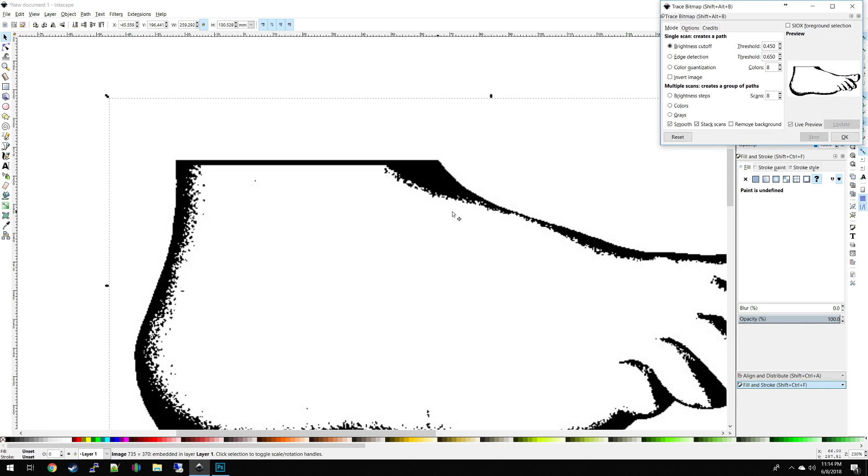Let's take the foot. Let's kill it. Bring in smaller foot. Then, gonna make a vector out of it. Trace bitmap. Close. Kill the original image because we don't need it. And now we got a foot. And back to where we were before, but I'm gonna make this 80 wide.

So a shitty add-on connector will fit in a 5mm by 5mm space. So when I do this, I always actually create a little port that's about that size so that I can figure out while I'm in here where I'm not going to put it, because you want to make sure the copper layer doesn't mess with that. So it's good to think ahead, especially when you're just doing the art part.

That way, if you're going to have an important detail, you're not having it somewhere it's going to automatically get removed. So I'd like to put this on the big toe. So big toe. All right, nasty big toe. Looks like it's shitty add-on friendly. Let's see.

Whoop. Hold on a second. It's the first time I've ever attempted to stream, so I'm trying to make sure everything's actually working. Alright. So cool. Bigfoot, little add-on, big dreams. Alright, let's go.

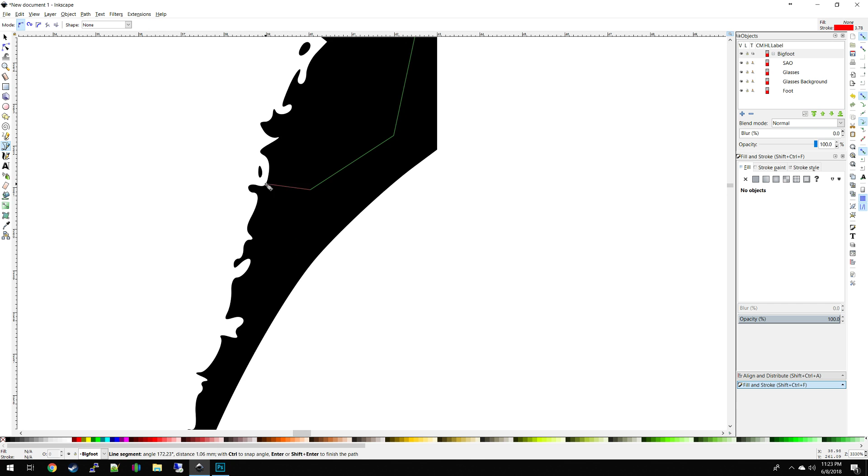I arguably spend more time in Inkscape than I actually do in KiCad at this point, because by the time I come into Inkscape, I have a really good idea of what I do in KiCad. So I spend most of my time doing tweaks and things like that in Inkscape, because I'm anal retentive about particular details.

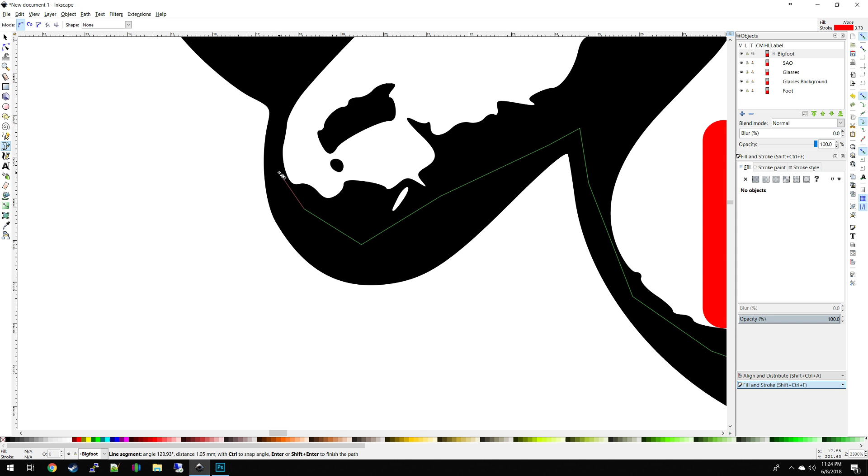Like, it's not a big deal on this because I'm just throwing it together, but when I work on actual projects, I don't like sharp corners on graphics because it's a sign of basically laziness, unless it's supposed to be a sharp corner. If it's a board itself, I really don't like boards that have sharp edges on them. They kind of don't feel so good when they stab you in the side when they're swinging from your neck at a conference. And it's also not that big of a deal to undo it, so there's no real excuse.

I didn't really need to include the glasses in that, but I'm going to anyway. I'm gonna kill the stroke on this. And I'm gonna do the fill. Actually, it's black, so... And I'll drop that to the back. And so you see, it filled it in. So what I really want is to get my board shape out of this, ultimately. So I'm just gonna call this foot fill because that's a weird name.

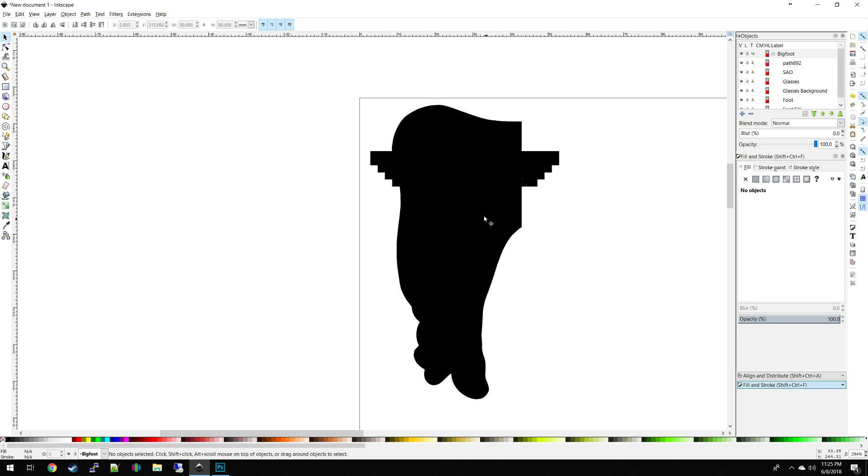And I'm gonna duplicate these, and with them all still selected, I'm gonna go ahead and come in here and do a combine. And that is basically what I'm looking for. Now the final moment of truth. Actually, I might have messed up in one area. We'll find out in a second. I want to click on that. Yeah, see, that's not good. So this is just a bunch of extra nodes, and it'll really screw up what you're going for. So I'm actually going to kill that.

I'm going to expand this out a little further for now. Oh, nice graphical glitch. And I'm going to do this again. Let's see. I also might have chosen the wrong thing now that I think about it. So foot, fill, glass, background, duplicate that, and path. Let's do a union. Yep, union was the right one. I just picked the wrong thing.

Okay, so this is ultimately going to be our board outline, and I'll show more about that when we get to that point. But it's good that you get this put together now at the early stages versus later, because if it ends up being a really complicated shape that you can't quite get your board outline, it's going to kind of fuck your day up, and you're going to spend a lot of time on it. And that super sucks.

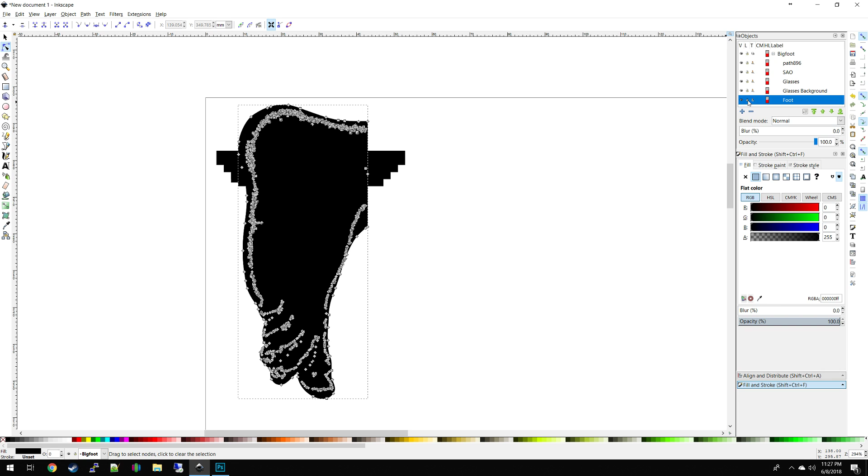So, alright. Now that I got this out of the way, I'm going to undo the move for it. I'm going to kill the foot fill because I don't need it. I'm going to keep the foot. I'm going to call this outline. And I'm pretty happy with the overall shape. So I'm going to go ahead and do something.

I actually learned this technique from the AND!XOR guys. Specifically Zap, he did a stream, and he showed a pretty interesting way on how to align your graphics in KiCad by using coordinates. If you import all your graphics at the same size, you can just use the base coordinate to align everything. I'm ashamed to say that I did it the super hard way manually until I saw him do that.

So keeping that in mind, when you make molds in real life, if you've ever seen how they do molds, they do something called registration, which is where you create marks that act as points so that the mold will come together smoothly, and it can only fit together one way. But in reference to KiCad, what I do is I'm going to make a shape. Actually, I'm going to make a new layer quick. I'm just going to call it registration because I'm only going to use it temporarily.

And let's see, how big is this combined shape? It's 50 by 80. So I'm going to make this registration, we'll say 60 by 90. And it's not going to matter, and you'll see why later. So I'm just going to make this 60 by 90, and then I'm going to put a stroke on it for 1 millimeter. I'm gonna make this stroke black, and I'm gonna kill the fill. And I put in the wrong code for that.

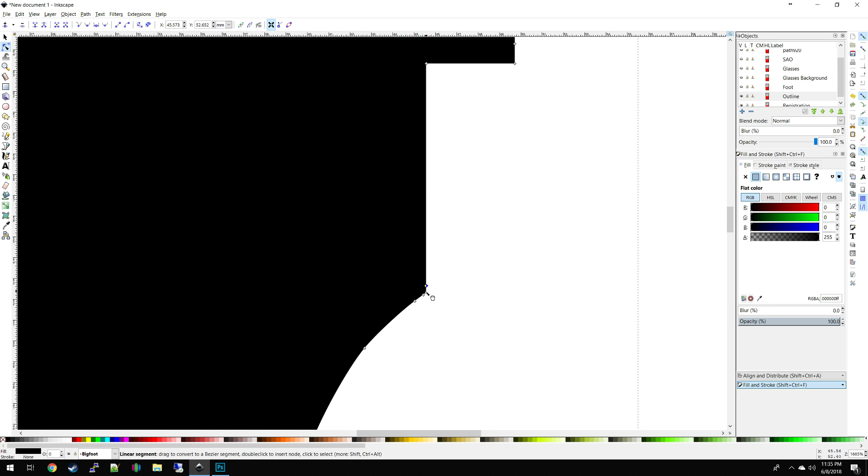And I'm gonna leave the sunglasses like that because that's kind of the whole point of them being like that. So we'll do it to this one. There we go. Now those are a little rounded off. That again makes me happy. And I did that to the outline. I'm not going to bother doing it to the actual foot because the outline's going to end up cutting it off anyway.

And normally what I would do if I wasn't throwing this together is I would fix it on the original graphic. So I'd do it on the foot and then I'd redo the outline. In this case, since I deleted the thing I used to create the outline, it'd take me a little longer, so I'm not going to bother with that this time around. So either way, we got a finished graphic. This is what we're going to turn into our board.

So how do we do that? So if you do everything in Inkscape, which if you're doing this like I do, you should. Bigfoot. And really, this is just great for putting together your board graphics. So, all right. So there's this extension. It's called SVG to Shenzhen. It's actually a very good extension.

I actually helped the person who threw it together. I was one of the first people to start using it. So thankfully, they've been really responsive to feedback, and they've gotten most of the kinks out of it. So it works pretty great. And to use it, once you do your graphic, you need to know how large your graphic is, and you need to pick your biggest number. So since I'm using the registration, I already know how big this is.

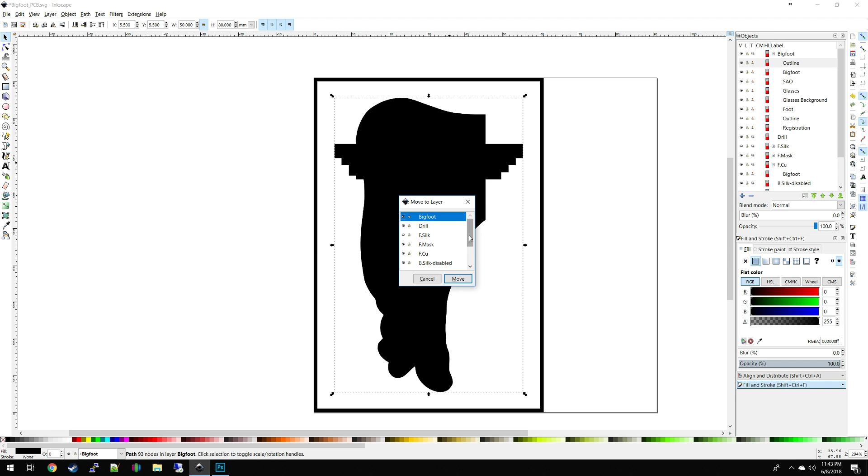And now the last thing, once you've got your silkscreen, mask, assuming you're doing anything with the mask, and your copper, is you're gonna need to deal with your edge cut, which is your outline. So I'm gonna copy the outline, show it. I'm gonna move it to layer, and I'm gonna show you the most important part now, edge cuts.

Oh, hello, Chewbacca.

Actually, I don't think I finished. Let's hide the mask. Yeah, I didn't finish this. Let me change this to black real quick. Alright, there we go.

Alright, now edge cut. So, when you click on the nodes, you see there's not really that many. That's actually not good, because it's going to use curves, and you can't convert curves to polygons for some reason in KiCad. They need to be flattened. So the way you get around that is you just add more nodes.

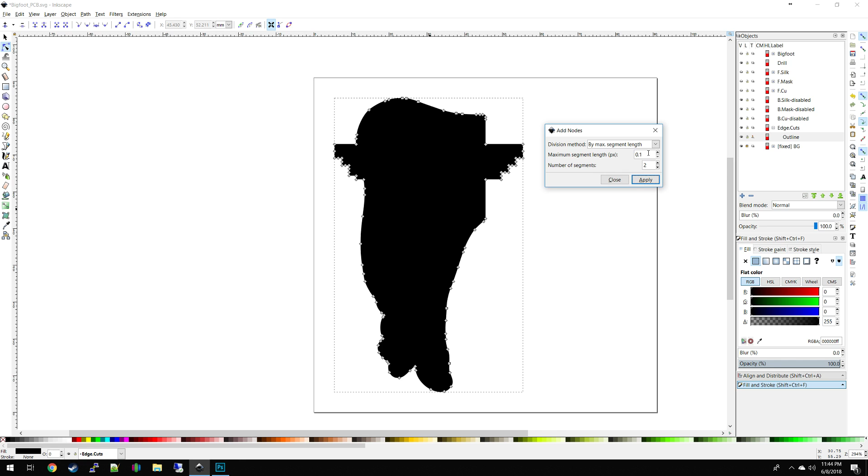So in Inkscape, you go to Extensions, Modify Path, Add Nodes. The first one you leave by default. The second one you change to 0.1, segments 2. You click apply. It takes a second; the more complicated your graphic is, the longer it takes.

The most important part, though, is that when you come back and you look at these nodes, they need to be on the outside. If they're not on the outside, you're gonna have a bad time later because your outline is not going to be correct. So, first, I just realized earlier I did not do the registration on the front mask or silk, so I'm gonna do that real quick.

Just gonna move to mask and duplicate again and move to copper, and that's gonna become more obvious once we're working in KiCad why that's important.

Okay, and now we're done. Now for this next step, you don't have to have your layers visible. If they exist, it's going to be included in the output, so you don't have to really worry about that.

I'm gonna get a directory here real quick just to make this next step a little quicker. KiCad.

Alright, so now when you have more or less your board done and your graphics done, I'm not going to do the back stuff. I actually usually wait to do the back stuff until I have a board in KiCad and my circuits in place, and that's just because you do some black magic fuckery to do more things than you should reasonably do.

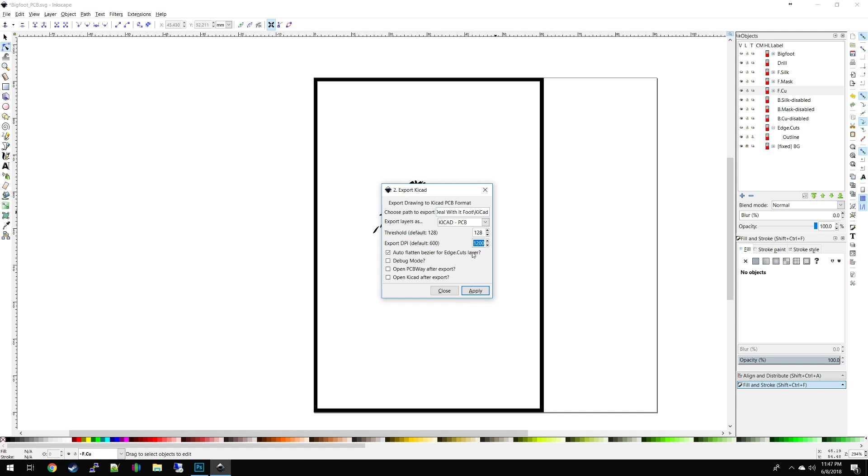Threshold, I've left it on 128 indefinitely. If you're working with black and white images, it doesn't matter, you're good to go. Once you're ready, you can export it out as a module if you want. I always just do it as a PCB and then work around it. It's kind of lazy, but it's easier for me, because this will take care of the board and the whole project.

So this takes a couple seconds as it's converting everything. Once it's done, the screen will close, and then you'll just have the leftover screen right here.

So that's it. I'm going to go ahead and open KiCad and open projects. I'm going to come over to Big Deal With It Foot, KiCad, and here's our project folder. This is what a project looks like once you've exported it out of Inkscape using the svg2shenzhen extension.

And what you'll get is a PCB board, and there it is. You can see the outline is exactly as I wanted it to be. And if we view it in the 3D viewer, there it is. Now, oh, I know what's going on here.

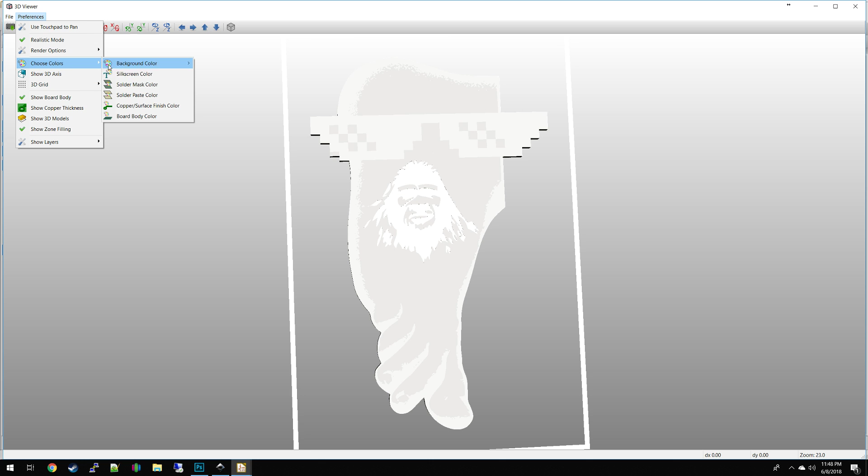So I'm going to change some colors real quick. I'm going to change the solder mask to be white, which was already white. So I'm going to change... no, solder mask was not white. Alright, we're going to change the silk screen to be black. And apparently I made that like off-white, it's not really white. What the hell color is that? White. Nope, that was the wrong thing.

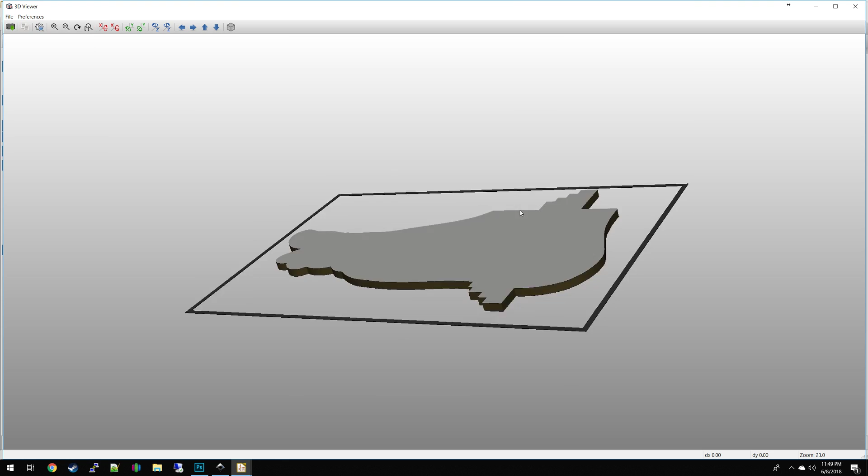Black. Solder mask, white. I don't know why it looks like that. Alright, oh, I know why, it's because it's the board color, it's slightly transparent. But we'll change that.

We'll change the copper finish to be brown, or more copper, so now you can see it shines through like that.

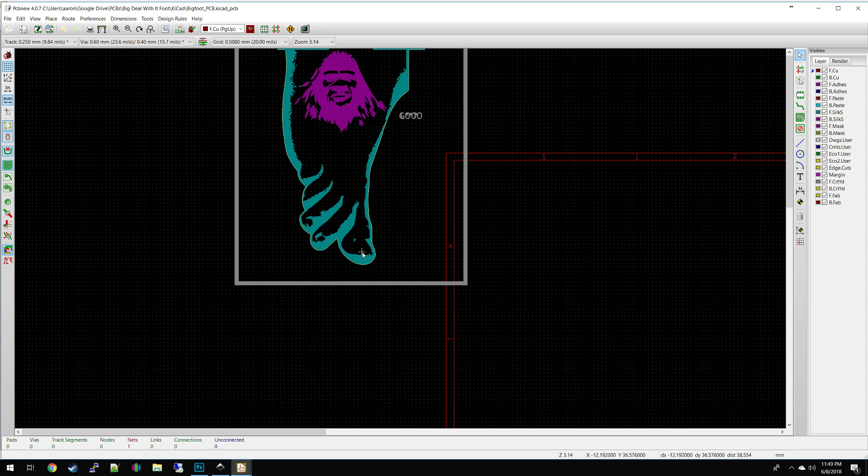And I just realized I missed something, but it's actually not a problem. I forgot to leave the registration point, or I forgot to leave the shitty add-on area. But that's actually not a problem because it's not a big deal for it to be on the silk screen.

But I'm gonna do it again, I'm gonna fix that because it's gonna bug me. So let me do that real quick. Let's duplicate, move to layer, and I kind of want to remove this from the silk screen in this case. I do not know why that just happened.

And we're gonna set this to white real quick.

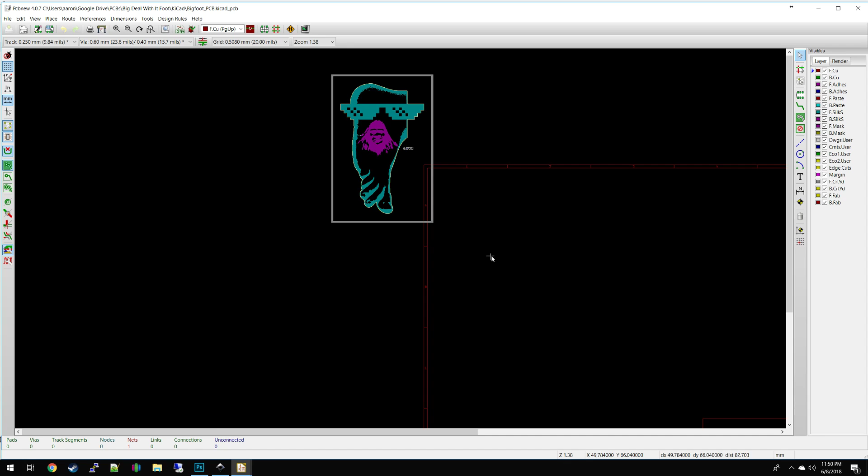Actually, this is a good opportunity because I can show you this next step. First thing you want to do is move your board somewhere reasonable - at least that's the way I operate. I like to drop it right in the middle, just out of habit. Once you have that there, the reason you want to drag everything all at once is because manipulating the edge line is kind of a pain in KiCad. It's actually individual little polygons, so don't do that. It's better to select everything and move it together.

I'm going to spread out all the parts so you can see the individual layers, also because when you export them out of that tool, for some reason it doesn't name them in a way that's easy to identify. So there you go - that's our 3 layers we did.

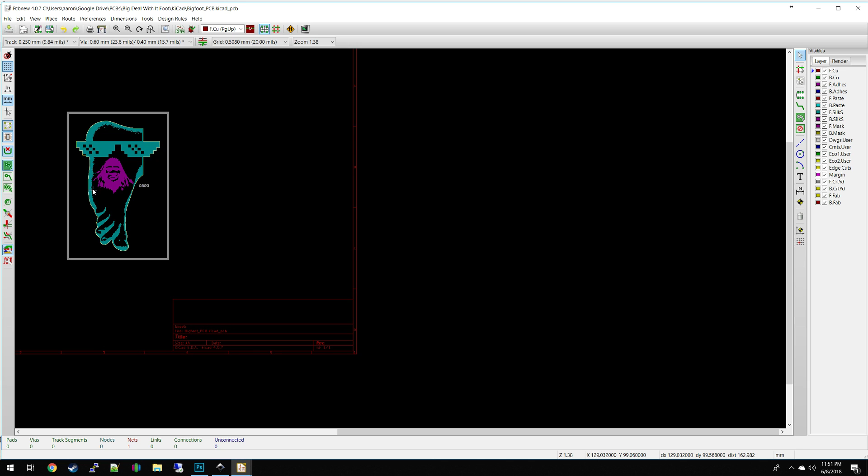Here's our copper, which we're going to start with first. Press E - I'm going to change this to say copper. Oh, I messed up. Actually, first what you need to do is go on any one of these, go to Edit Parameters, and get the position.

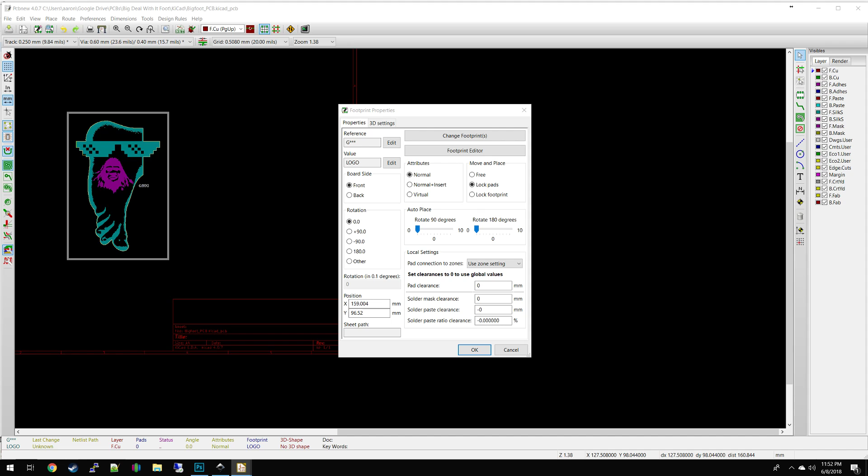The position is super, super important, and I'm going to make a note of that right now. My X is this number, my Y is that number. This will make it easier to position things when you're making changes, which I'm about to do. So I'm going to spread this out again.

I'm going to change this to say copper, f.copper. I'm going to change this to be mask, f.mask. The reason you do this is because when they're stacked on top of each other, it's really difficult to manipulate and move them. So if you have your coordinates and name them, you can just press T, say I want f.cu, and it'll select it.

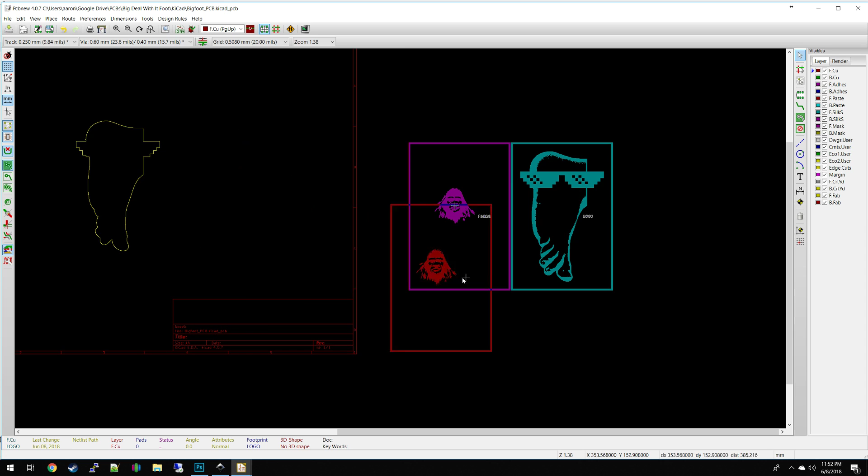And then if you edit it and get the coordinates, it'll go back perfectly into place every time. So this one, I made a slight change so I would have the shitty add-on kind of taken out of the silk screen. I usually do that for the copper layer and not so much the silk screen layer, but this one's a little unusual for what I did.

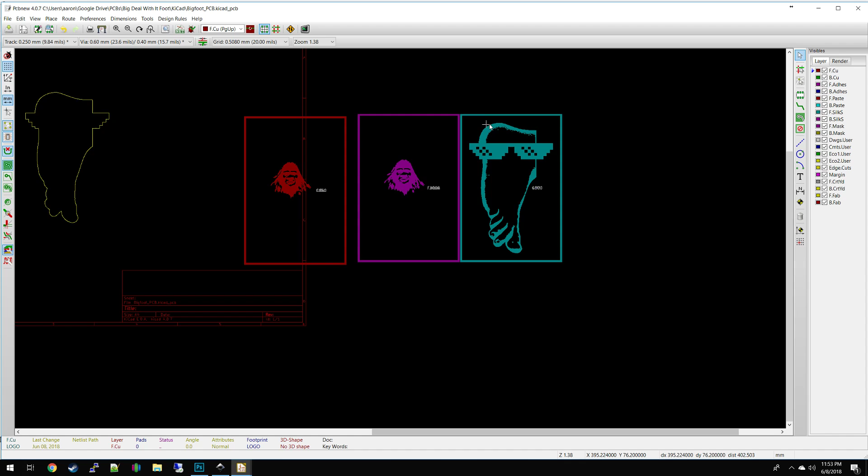But I'm going to delete it. While you have KiCad open, your project file can be updated but it won't be deleted. So I can come back in here, go to extensions, export KiCad, leave it as PCB, apply it, and it's going to reprint or recreate the board and everything.

If you have KiCad open, it's not a big deal because you can come into your part selector, select by browser. It's going to be named based on whatever you named - mine I think I did Bigfoot, so here it is, Bigfoot PCB. And this should be our updated silk screen, and there it is - you can see the difference.

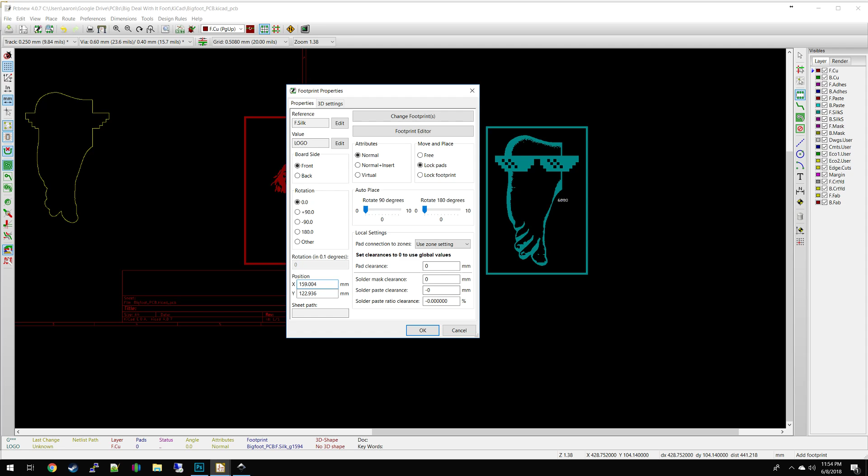Done. Same thing with this one, but I already renamed it, so I'm just going to do the coordinates. But as long as you leave it open, you can bring it in.

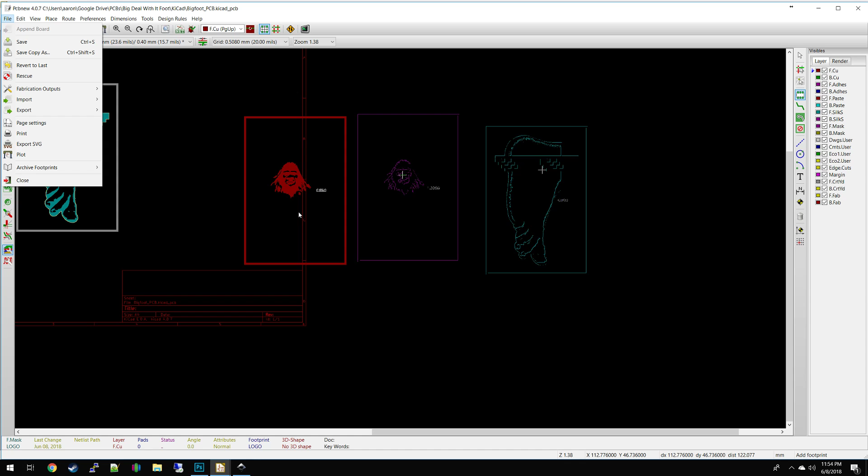Now if you create a circuit and close KiCad - or excuse me, if you close the Pcbnew part and export that out, you just overwrote that file. So another good thing to do is come in here and do a save copy as, and save a different version to use as your board. That's one way to keep yourself from accidentally overwriting your board when you really don't want to, which I have done before. It's extremely frustrating.

Thankfully, I use Google Drive, so as long as I did it within a certain time frame, I can usually just restore an old version. But it's a nightmare, so don't do that.

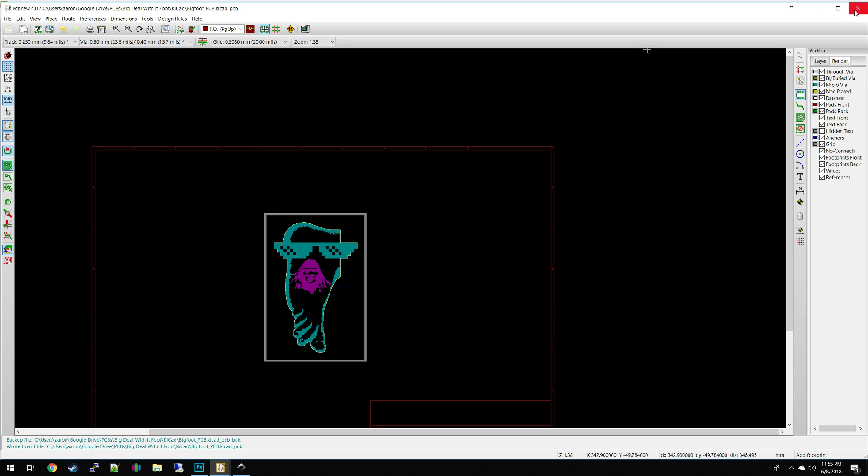So now that I've gotten this out of the way, I'm going to go ahead and do the schematic stuff. And I am going to cheat - well, no, the circuit's simple enough, I can just do it from scratch. So I'm going to close this.

I actually need to do my libraries real quick, so I'm going to knock that out. I'm going to come in here and go grab my libraries. User - that's Windows, User, my real name's Aaron, deal with it. Google Drive, Google Drive, Google Drive, PCBs - you guys are seeing a bunch of projects that aren't even happening.

KiCad, and I always preference everything by putting my tools, custom parts - this is something I use. I'm going to only use it for this project, even though I use it on all my projects. And I'm going to go ahead and bring in the shitty add-on one while I'm doing this, and then when I go into the next part, I'll bring in the library file.

Big Deal With It Foot KiCad tools, shitty add-on, Badge Life. Next, current project, finish, done.

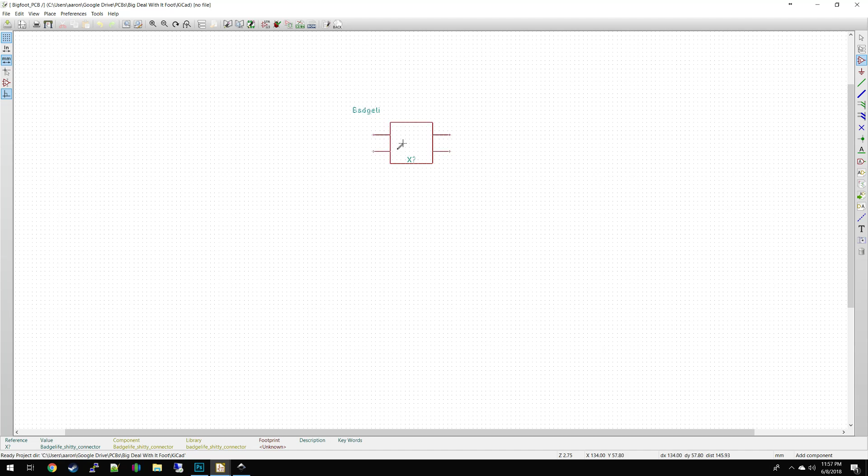So we're gonna start the shitty add-on connector. Right here, I'm going to rotate it to my preference. And my add-ons for the most part are just LEDs. I don't do anything else because I frankly haven't had the time to really learn.

So first thing I'm gonna do is kill these connections, because these are the serial connections that I have no intentions of using.

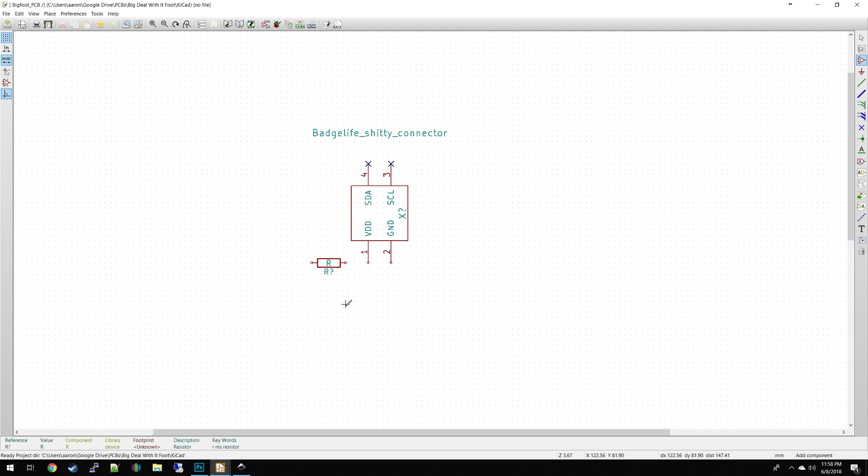Now I'm gonna bring in the resistor. Oh, that's weird, I don't know why I was doing that, but okay. I'm going to roughly place it right here. Bring in our LED, and I'm going to flip that. Another LED, flip that. Actually, yeah.

I forgot a part, now that I think about it. So when I did this part, I didn't actually create a place for the glasses to have a shine-through. So I'm going to fix that after I finish the schematic real quick.

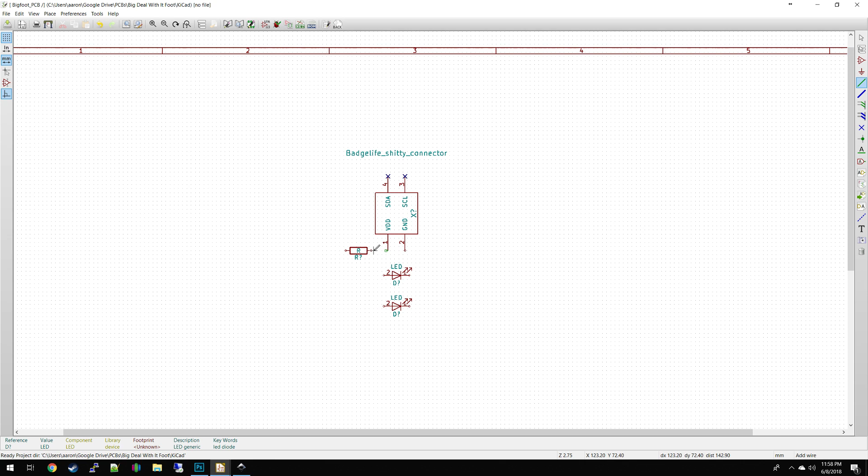So we'll just connect everything together. Yeah, what the crap? Of course I'm streaming this, so I'm actually seeing weird things I've never seen before, because that's how that is.

Alright, and we're gonna annotate everything. Yes, singles. Well, I'm gonna change the value to R51, because I use a 51 ohm resistor when I do this with the LEDs I normally use. And everything else looks good.

Let's see, I don't know why it's not coming up automatically, but I use 0805, hand solder them, and then... I don't know, there it goes. That was weird. And then we'll do the shitty add-on.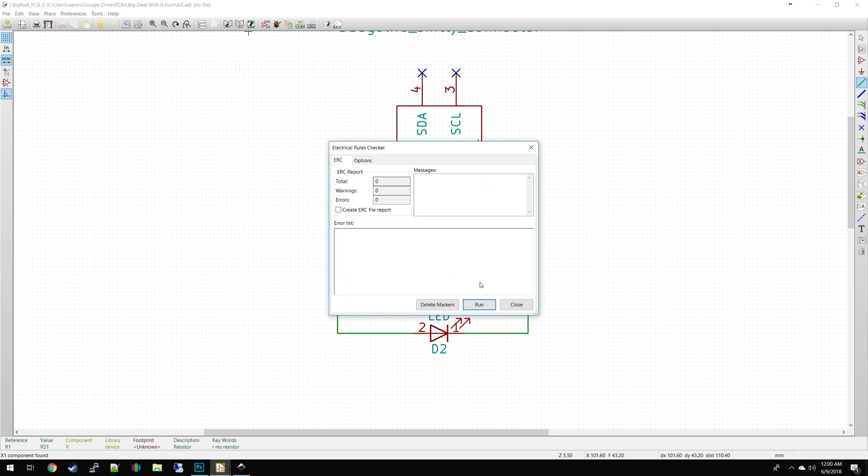Save that. Close that. Actually, run the check real quick, make sure I didn't miss anything. All right, good. I'm going to generate our net list, save the schematic, and that's it for our schematic.

So I was talking earlier about the LED. Let's see, I'm gonna place it on this square. So what I'm gonna do is copy these two. Not from there, I'm gonna copy these two. Move to...

Mask. Hide this. And what I actually want to do, I'm going to make this red for the moment, because what I actually want to do is make some of these squares red. Or black.

So you gotta get kind of specific on the size for this one. Oh man, I hate when it does that. Yeah, now I just have a tiny circle or square.

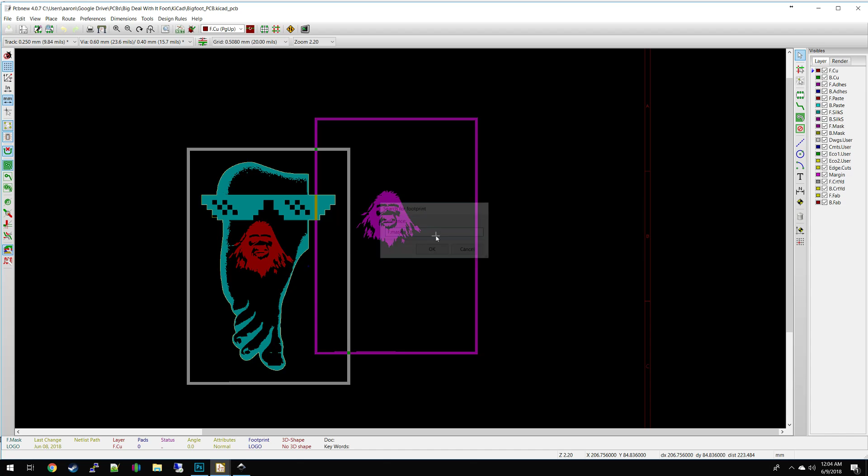And so I'm replacing the mask, so I'm going to go ahead and select the mask, and I'm going to kill that one. And I'm going to bring in the new hotness mask, which is this guy. Now I've got my little mask, and that's going to be where the solder mask is not going to be.

And I'm gonna edit it, change the name so I can select it easier, mask, and I'm gonna go ahead and change the position to match those coordinates I was talking about earlier, so that it just goes back where I need it to be.

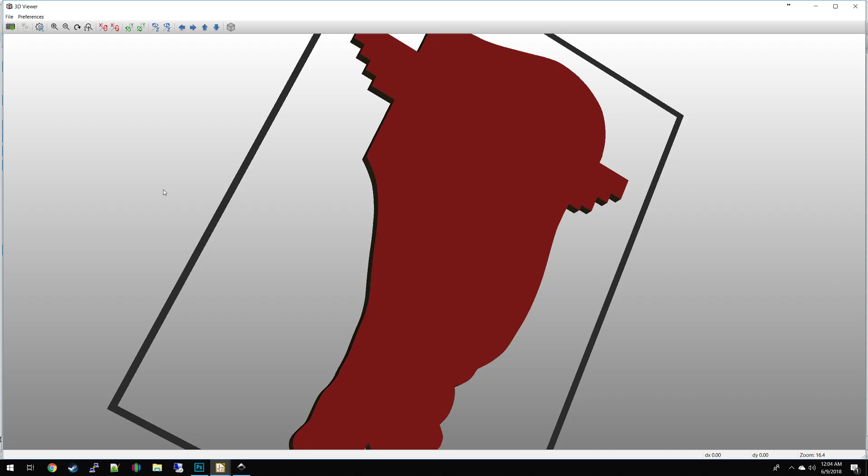All right, and now when we 3D view it, we see that there's these two brown dots that represent being clear. Now that's going to be really useful on the schematic when I place this. So because now what I'm going to do is I'm going to bring in, I'm going to change this because I like having those dots.

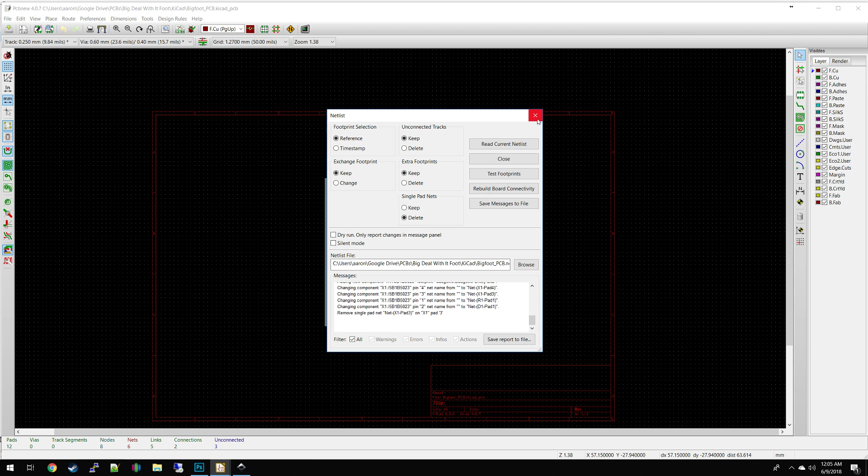I'm going to go ahead and bring in our list. I'm going to read our net. Yes. What was it? And I brought everything over here. And what I'm going to do now is I'm just going to check this, like that, glue in place, spread out all not already on the board. That way it'll leave all those other parts. And the first thing I always place is our lovely shitty add-on.

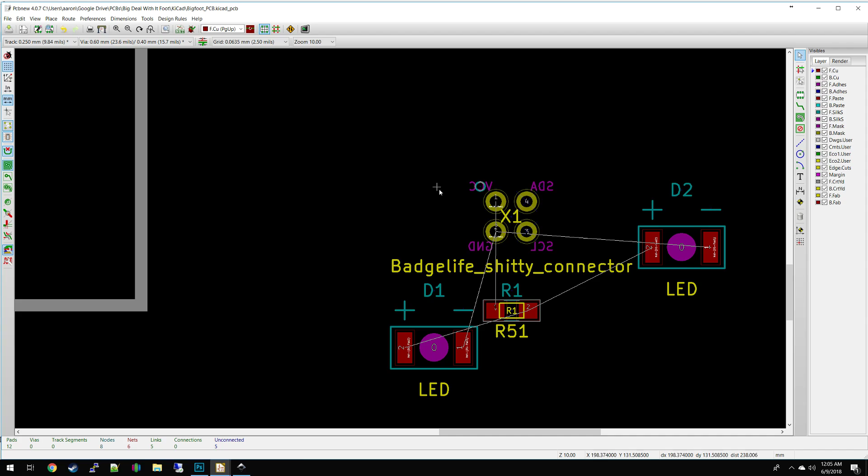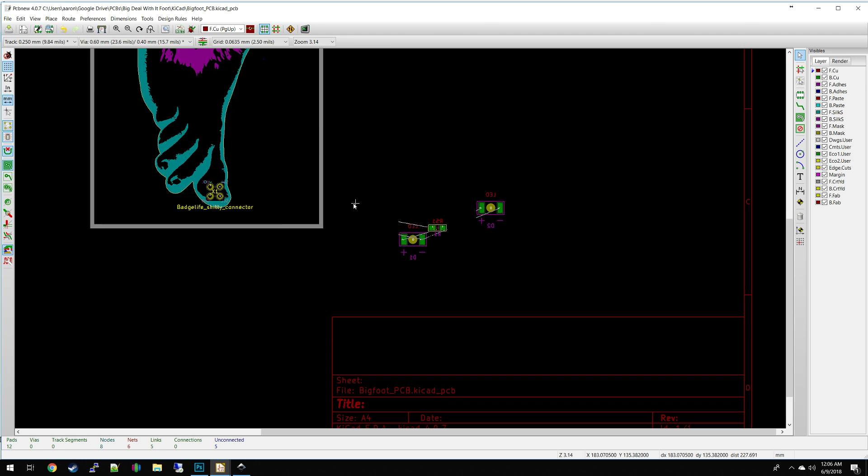So I'm going to drop my grid down in size to about that. I'm going to select it, come in here. And there we go. That's good. And if I really want to, I can move these around, but I'll look at that later. Now, these are all going on the back, so we're going to flip them. And I'm going to go ahead and hide our front silk screen and our front copper because I'm not going to use that right now.

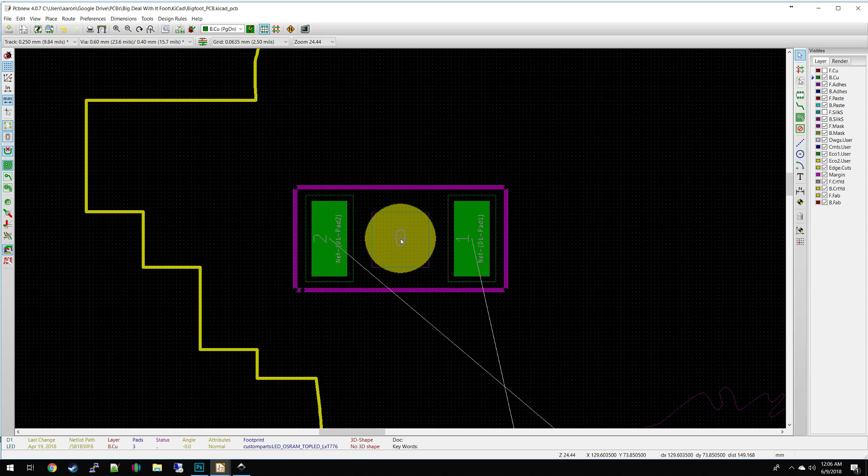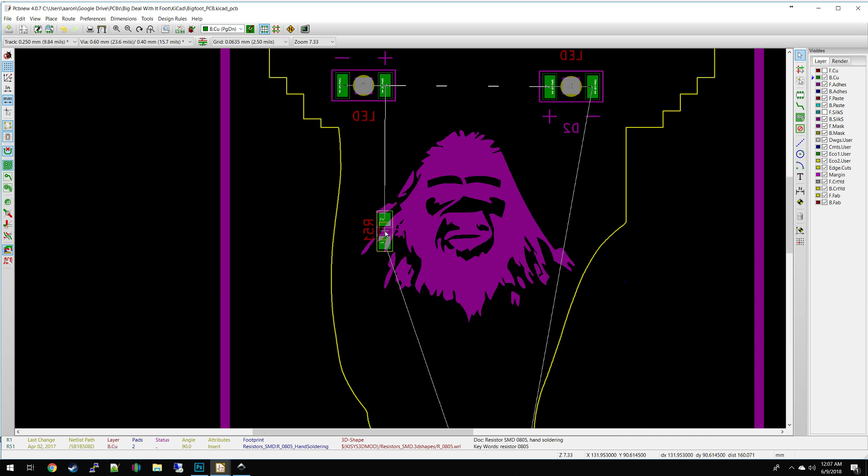And let's place these LEDs. I'm going to just eyeball this. That's actually not bad as it is anyway. And actually 2 is going to end up connecting to each other, so like that. Maybe this one. Right here. Like that. Bring in our LED friend. And I said I was going to connect it to D1, so I will do so. And it doesn't really matter where this goes, but I'll just put it right there for now.

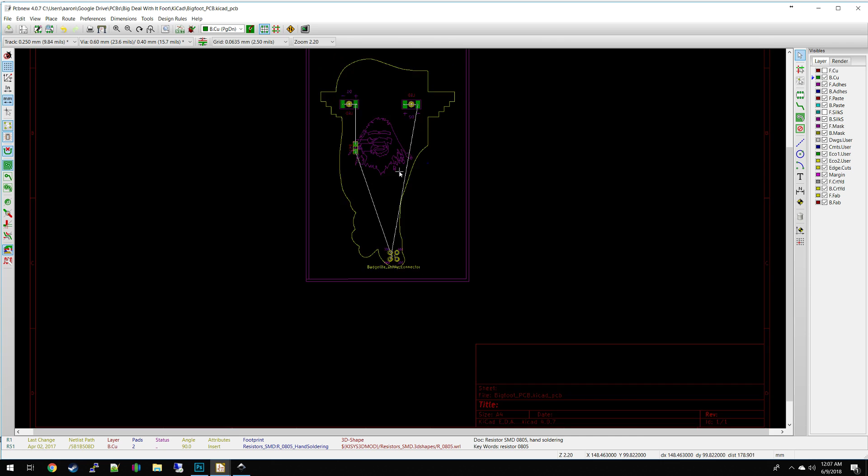And one thing you gotta worry about when you're positioning the shitty add-on is since you're putting it close to the board, you want to make sure when your copper fill comes in, because I'm gonna cheat, or it's not really cheating, it's kind of what you're supposed to do, but if you're too close to the edge, your copper fill won't do what you want it to do. So it's a real good idea to keep an eye on that. I'm actually gonna hide this mask.

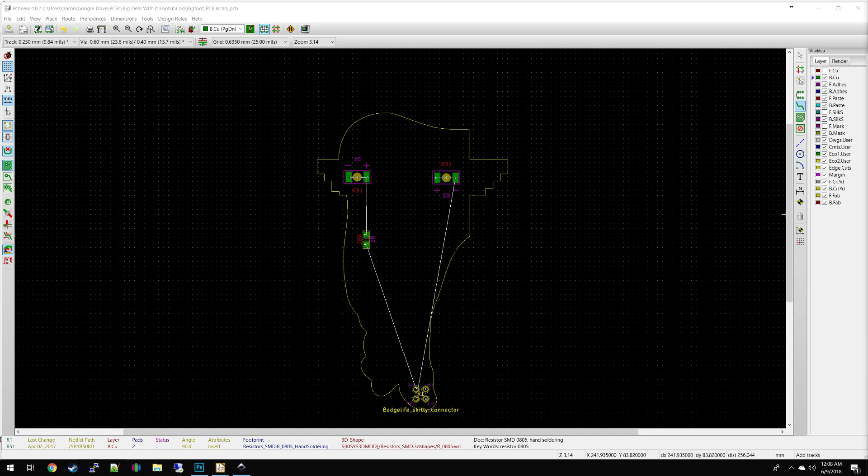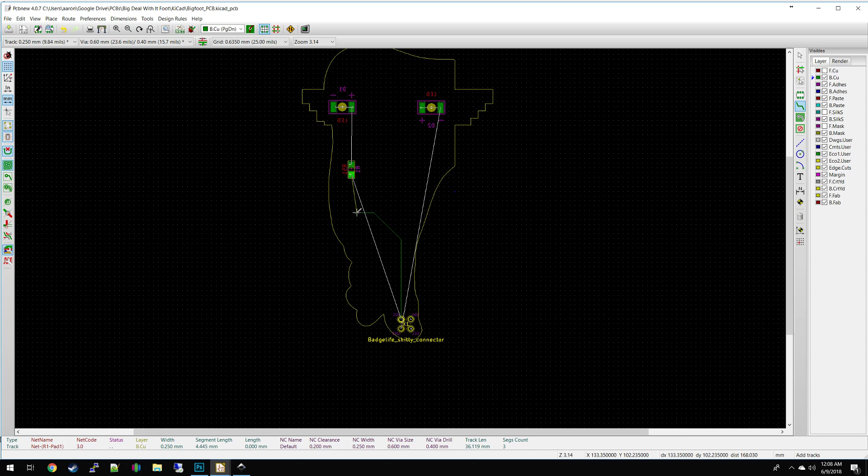All right, so my LEDs are placed, and you can do some cleanup on this later. But I'm gonna go ahead and run some wires real quick. I'm gonna increase this, and I'm gonna turn my tunes back on. And I'm gonna go ahead and just connect this, and I'm gonna do this in the least graceful way possible. Apparently. I do not know why I'm doing it this way. There we go. And connect that there. And that there. And I'm gonna... Oh, actually, there's one more thing.

With the particular design for these LEDs, you have to make sure that you block out any possible copper fill. Because you can't do it when you're making the damn part for some stupid reason in KiCad. So I have to do this every damn LED every time I do a board. And it's kind of annoying. If I could just do it when I make the part, it would be easier.

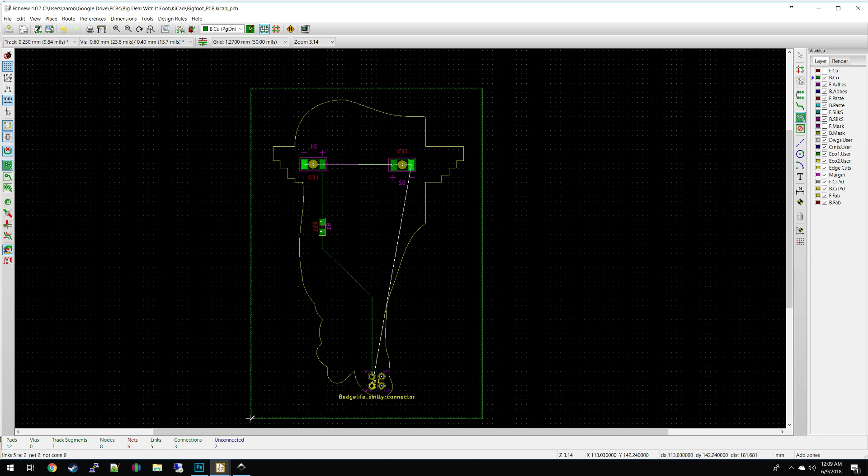And alright, and that's it. And I'm gonna do quick copper fill, and we're gonna base this net on the D1 pad, and that should give us what we're looking for. Press B, fill, and let's come down here. Good, I had just enough clearance there. This doesn't matter, I'm not using it.

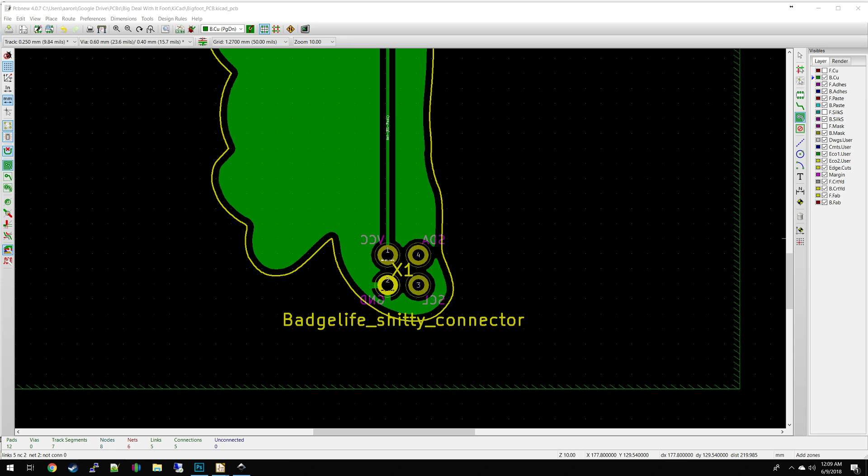If it did matter, what you would kind of want to do is you'd want to go in and just kind of move this up a little bit, but since I integrated it into the silkscreen, I would also need to go back and update the silkscreen to reflect that change. So that's kind of important. But that's kind of it. That's like the basics of creating a super quick shitty add-on.

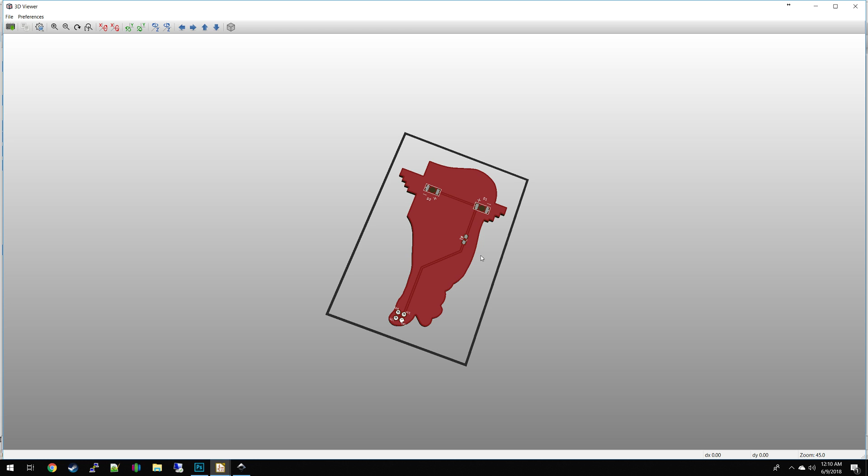Now, from this point, you have a board that you can send off to Fab, and when you get it back, you can solder a shitty add-on connector or 2x2 header to it, your 2 LEDs and your resistor, and that's it. That's a working add-on for all intents and purposes.

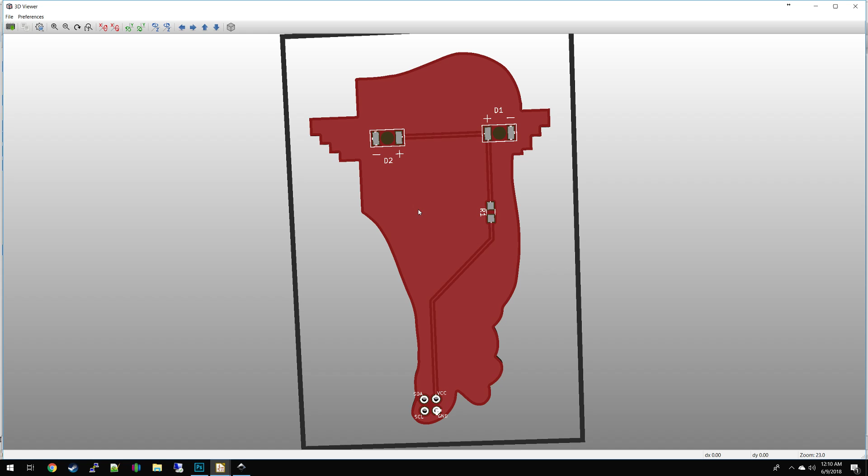Now, if you want to do some black magic fuckery and embed, now the silkscreen you can just do whatever, but if you want to embed messages and things like that, or images into the copper layer, you kind of have to do something that I'm pretty sure the design rules check would flip their shit about. In fact, we'll go ahead and start this. Alright, everything's good. In fact, I can test that theory.

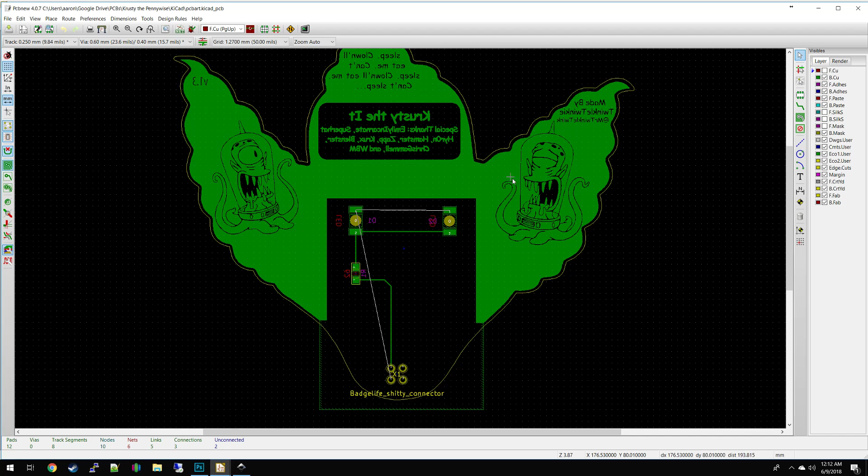Otherwise, you get this. You get this nice gap there, and that looks like shit all the way around. When you view it in here, you can see this nice thing that's not supposed to be there. So how you get around that, which I'm going to Control B this, is you... oh, I didn't name my stuff correct in this one. Why do I always mess up?

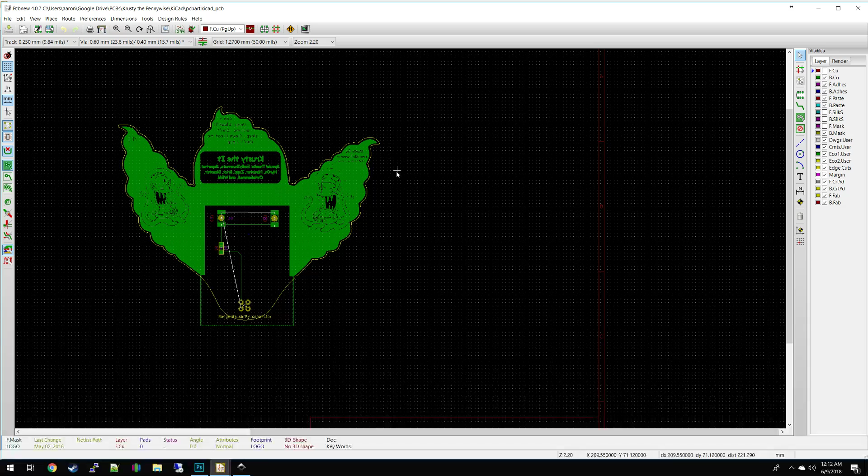See, this is a project I did before I started doing the registration squares, and you gotta manually place the shit, and it super sucks, and finding things and placing things is terrible. But I'm not gonna save this. So I'm gonna do a quick example of that, and the best way is you start in KiCad. So in KiCad, you pull up Bigfoot, and by the way, this is what it looks like with all the layers. Kind of neat.

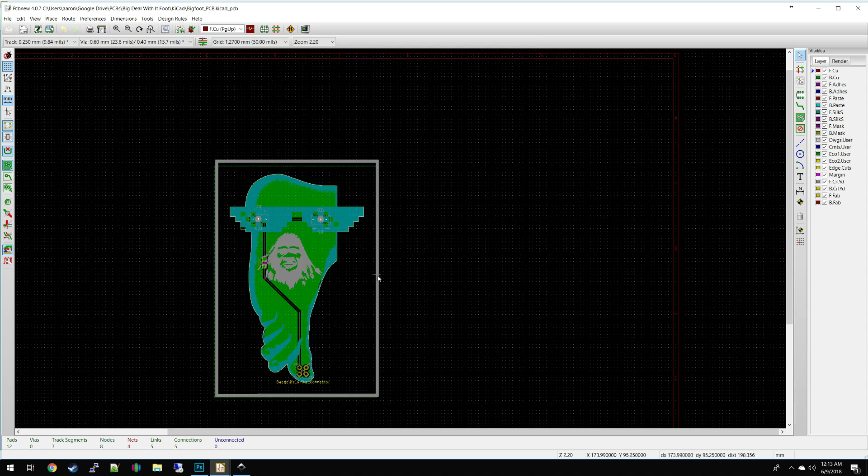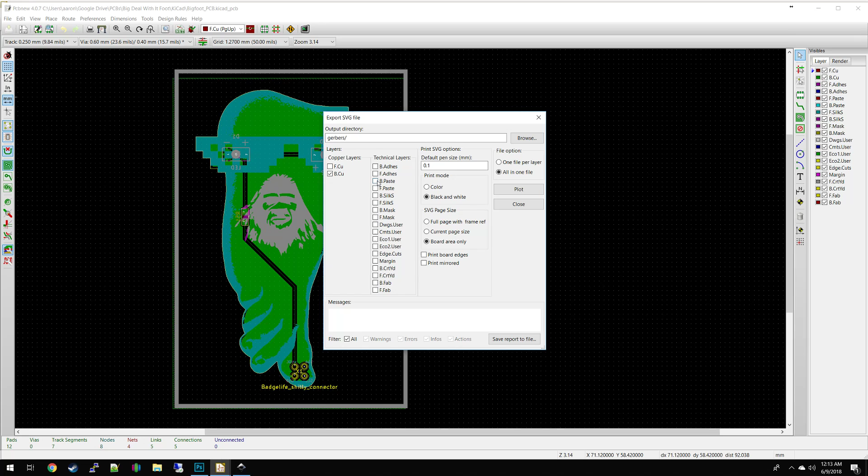What you do is you export out an SVG, and then you import it into Inkscape, and you do the reverse. So export SVG. You only want your back copper. If you care about existing silkscreen stuff, you'd want to bring that in. I'm not going to do that in this case. I am going to, however, include the front mask, because it'll bring in the registration and make positioning it in Inkscape a lot easier. So I'm going to plot that, and you want to make sure it's black and white, board area only, so on and so forth.

And here, I'm gonna do this all on the copper layer. So I'm gonna click on the copper layer. I'm gonna hide this mask. And I'm gonna go to File, Import, and it should be in my Gerber folder. Yep. All right. See, it brought in the registration with it, so now I can position it correctly. And it's really important that the first time you do this, because you're going to do this twice, you do it with the full fill.

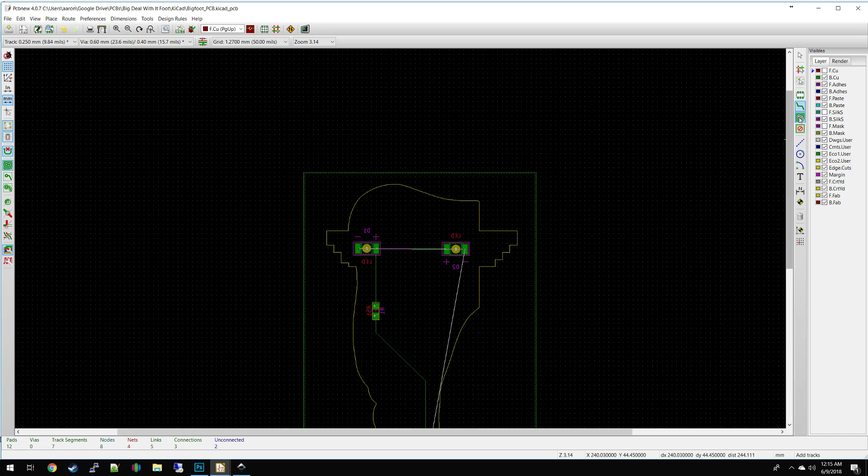Because what you're going to do next is go back into KiCad. I'm going to hide my layers again, so I can see what the fuck I'm doing. I'm going to get rid of that, and you're going to delete this. Yeah, you would delete this if it would let you delete it. I hate when it does that. Alright, and then you're going to manually round this thing out. And this isn't so bad.

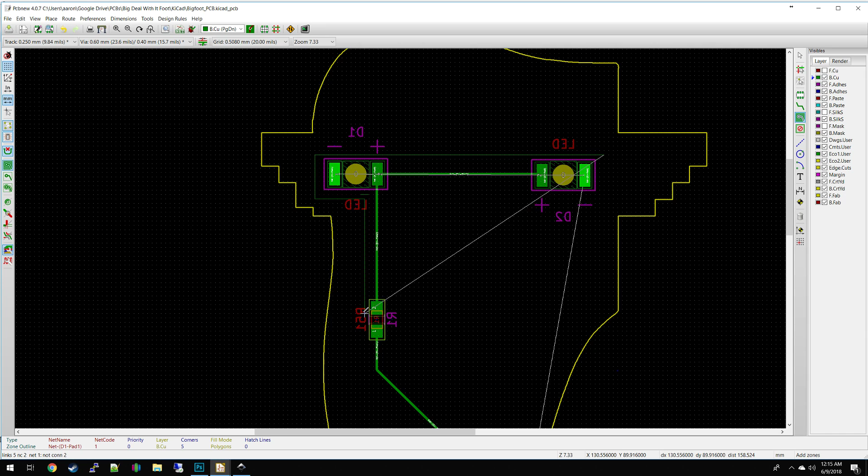We're running this on the back, we're running it on the D1 pad. And so you go around manually around your trace stuff. Now, admittedly, this method is only really useful when you're working with really simple circuits like this. With a more complicated circuit, obviously, the feasibility of this goes out the freaking window. But otherwise, this is a pretty good trick.

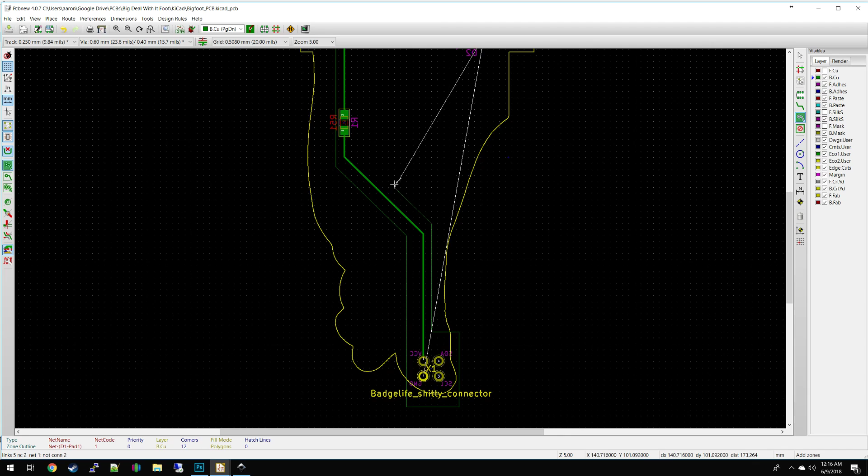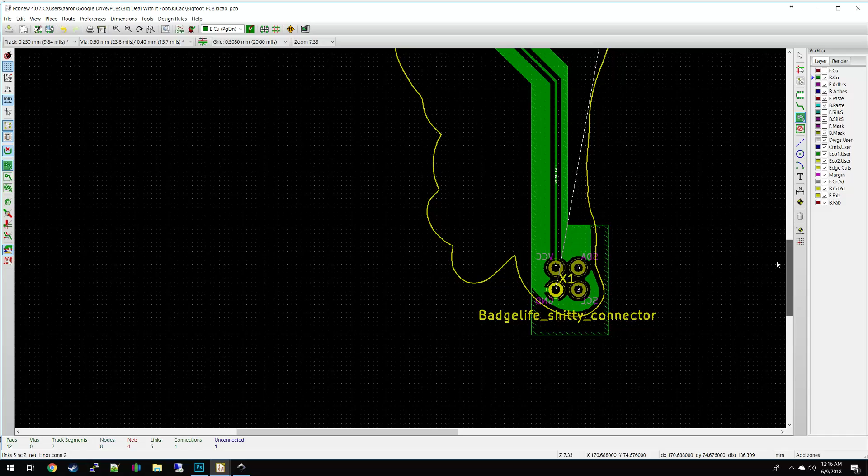So when you're coming around your add-on here, you just want to go outside and get that nice outline. That way it looks like it's supposed to be that way, and like the software let you do something it totally wouldn't let you do before. Come out here, and you close it. And then when you do your B to fill it, you should get your fill, and this is all connected, so it's still technically correct. It's all technically kosher. Design rule check does not freak out when you do this.

And then you're going to export it out again, but with only this. And this is going to be your no touch zone. This is where you can't put a graphic, for reasons that I hope are obvious. So I'm going to export this as an SVG again. And when you do it the second time, it's going to overwrite it. That's why it's important to get it imported quickly. And I'm going to import it.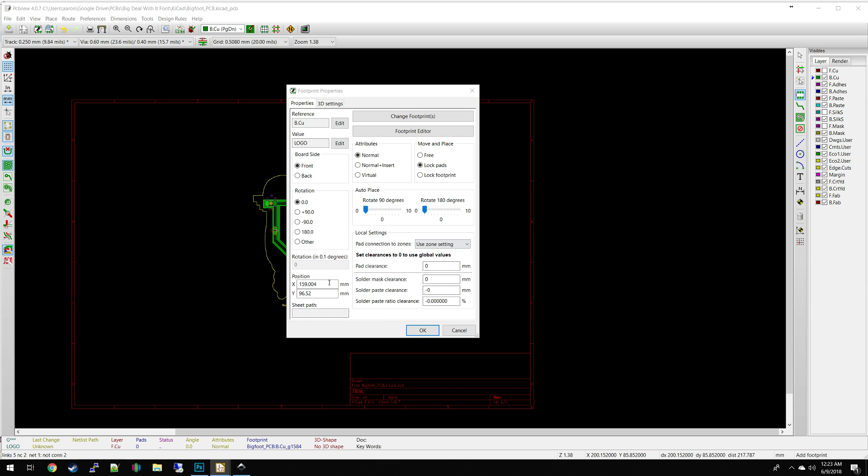And we should have a new back copper layer, and you got all this fresh dope copper that you didn't have before. And what you're going to do is you're going to come in here, you're going to edit it, you're going to change this to a name you can actually find. You're going to pop this in those special coordinates we've been using the whole time. Oh yeah, that was super sloppy on my part. Yeah, I should not have been so sloppy. I know better than that. Okay, not a big deal.

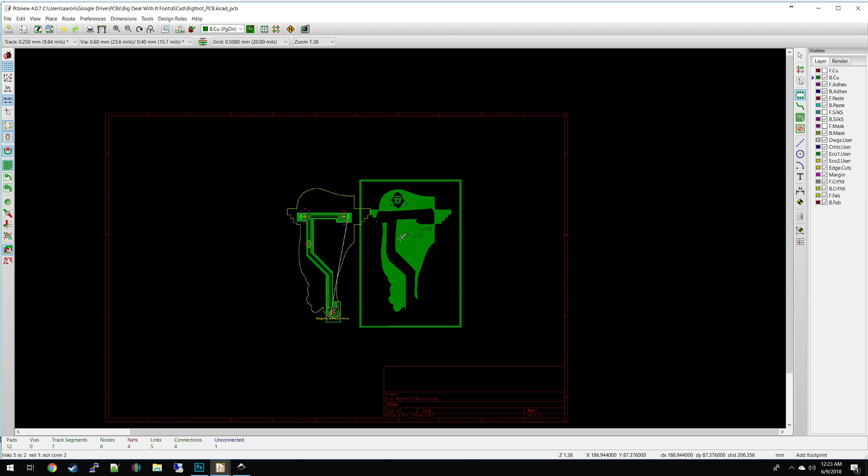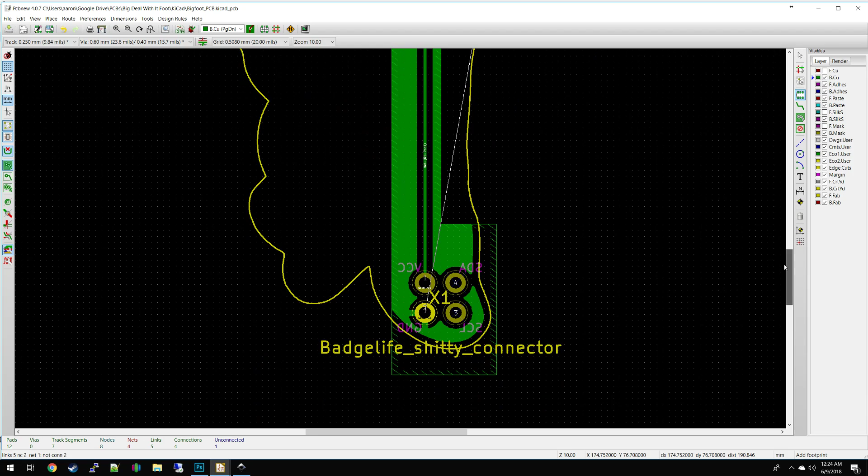Oh, why is my... what's with my net here? Why are you doing that? What did I not do? Let's follow you down. Oh, yeah, that's not, no, that's not okay. Yeah, that's not good. Or can I fix that easily? Right here. That's my problem area. So I've got to actually redo this because I screwed this up. But you kind of get the principle of it.

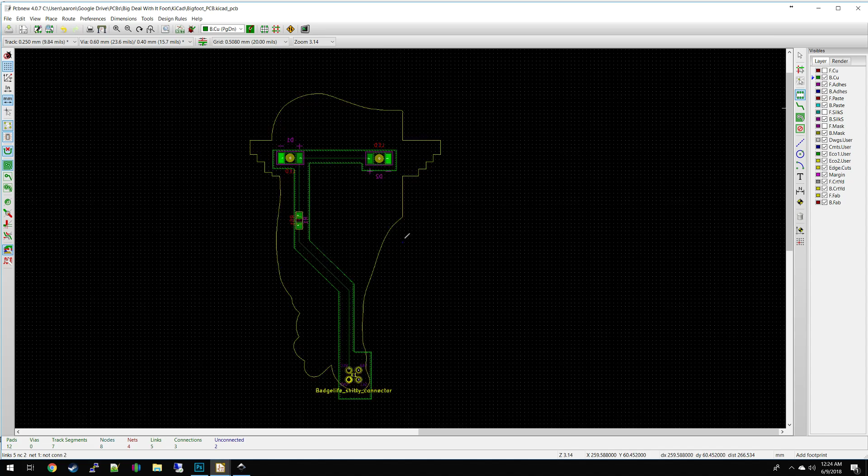But let me fix that mess up first. Ugh. I can't believe I did that. I should have noticed that before. Alright, let me delete this. Yep, you had one. Yeah, sure, whatever. And I'm just gonna do this real quick and dirty.

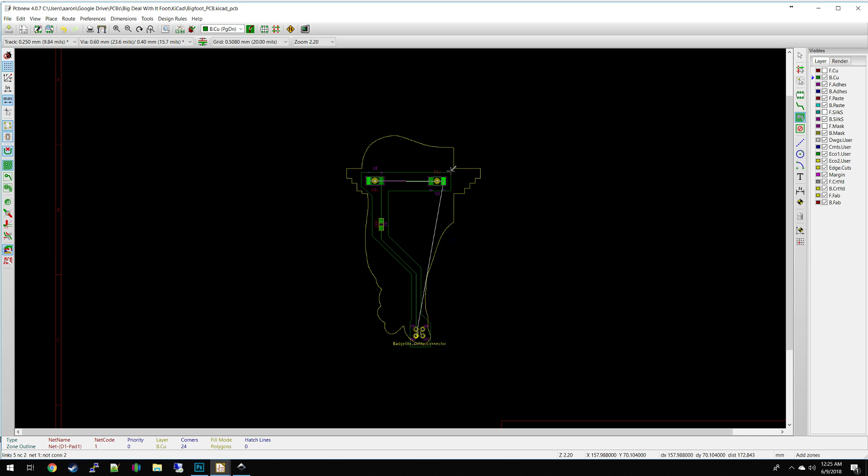Okay, I can fix it that time, so good. All right, now bring the SVG in, plot, and I actually need to. What's that? I want that, so I'm gonna kill this one. Import it again. Let's go through here. Let's find Bigfoot again. Doesn't actually matter if I remove this, but it makes me feel a little better.

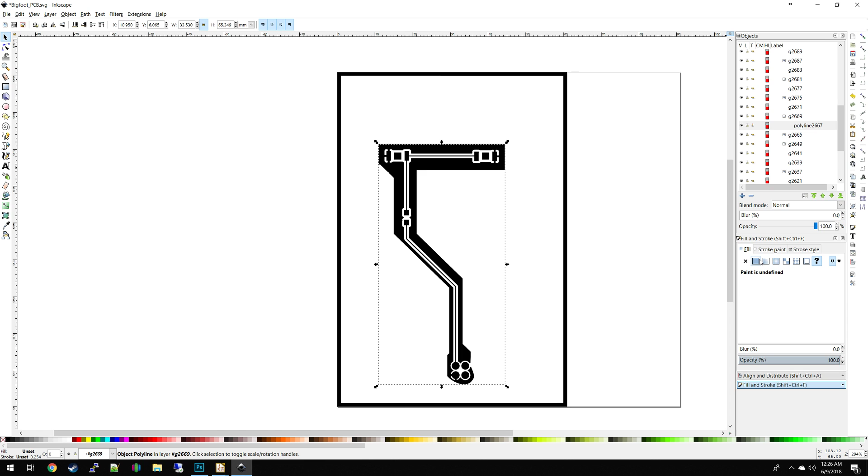So where I messed up is what you're actually supposed to do is you need to find. Is it this one? Is that our golden boy? That's our golden boy. You gotta find this. Change the fill to be white. And you gotta change your stroke to be white. And actually, for the moment, I'm going to change this because you still have to fill this area in, which is why I was thinking incorrectly. But I'm going to come at it like this.

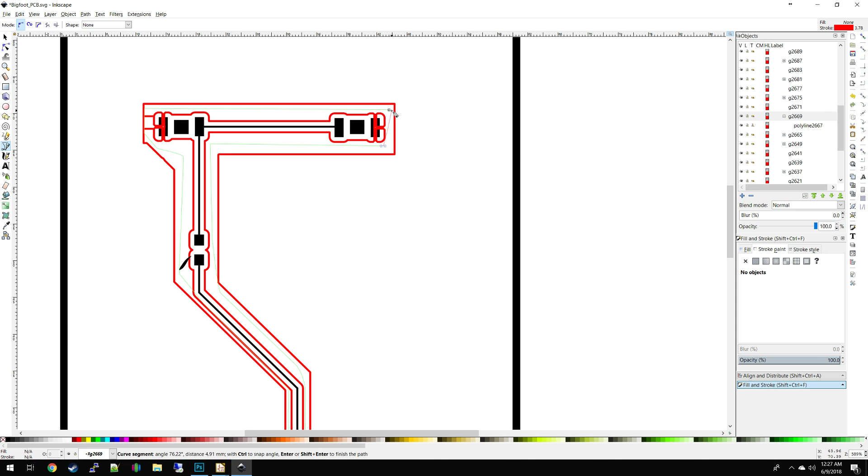Fill, make that white, kill the stroke, and what does this? Back copper. I'm just gonna move to the top. It doesn't matter, and change this back to white. Okay. Now what we should have when we unhide this is our perfect shape. All right, there we go. That's what I'm actually looking for.

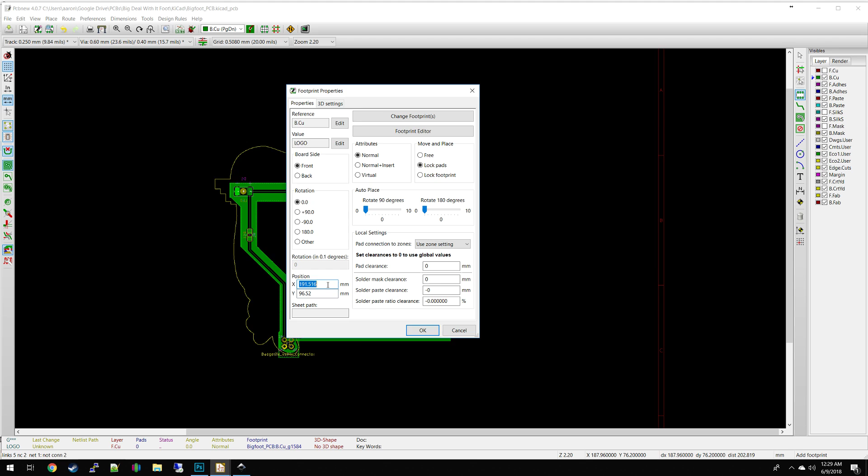I know what's causing this, but this isn't actually that big of a deal. And export to KiCad again. And in KiCad, we're going to select our part. Edit. Change the name of the part. And we're going to pop in those coordinates. That's it. And you see it. In this case, when you do it perfectly like that, there's no real overlap. And that's assisted by the registration.

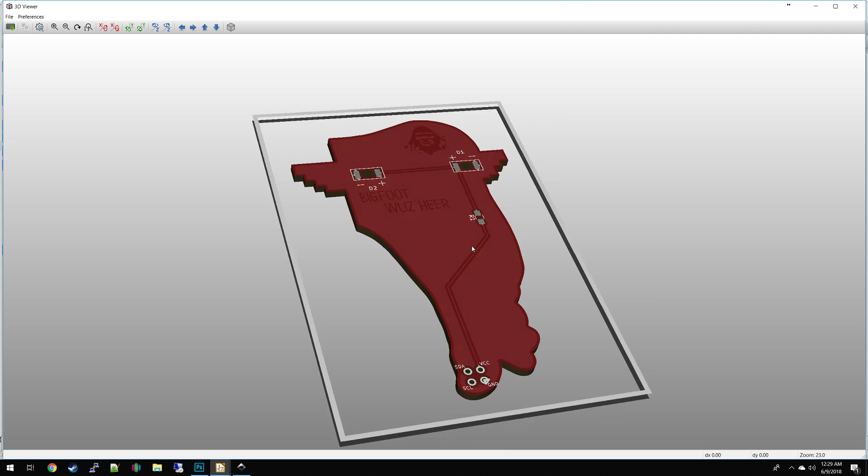That's actually one of the bigger things about using these boxes, and when you view it in a 3D viewer, you can see those boxes, but it's actually not a big deal, because when you export them out as a Gerber, which we'll do right now. Let's see this board, Gerber. In a real world scenario, there should be a back page. Yeah. And that's right. Plot, and get our drill file.

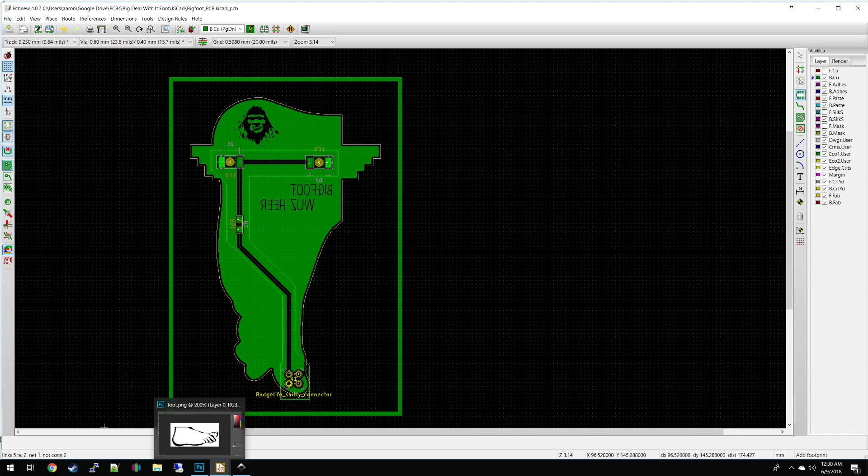And I actually like to use OshPark as kind of like my verifying ground. So, no, don't do that. And I'm gonna name it Bigfoot Gerbers, and I prefer to date my stuff. Just makes it easier when I'm doing multiple versions. And let's see. We'll go to OshPark, we'll browse for them.

And you can use the Gerber view. There's nothing wrong with using Gerber view built in KiCad. I just like using this. I do both actually. I look at Gerber view and then I look at this because I tend to save these renders. And before I submit them to Fab, I can always use this to go, oh no, that's not what I did. But you can see here's where the absence is in the copper layer, and everything still checks out.

Now you can clean this up more. You can change the orientation of the silk screen in some areas. That's what I would normally do. And where this through hole is, where these copper pads are, if I was to make this and have it in hand, it would shine through. So, and that's pretty much it. That is, in a massive nutshell, start to finish, my process.